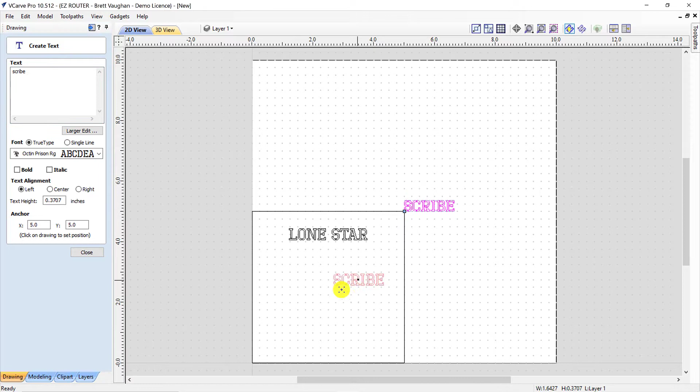We'll close that out and create a new one, let's do Scribe. We'll put that in here. So let's do some centering up here. So everything's centered. Go ahead and put a hole in here so you see the transitions, and we'll make sure that's a 1 inch. And apply.

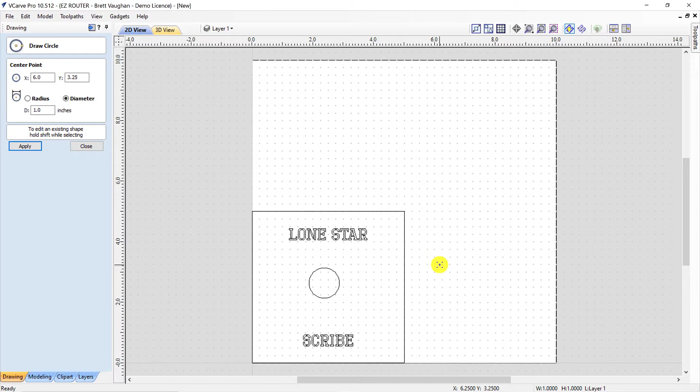All right, so here's our letters. We're going to scribe here, and scribe this, and then we're going to cut this out here in the middle, and then we're going to do an outside cut on that.

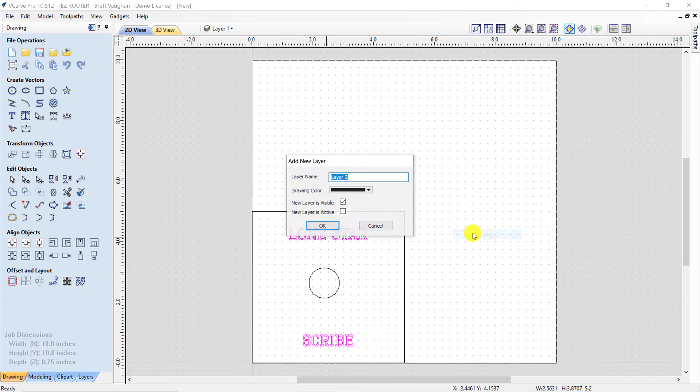So what I'm going to do is hold shift and right click - this is a layer, so I'm going to make a new layer and call this layer Scribe. You can change the colors if you want, just so you can see which ones are on the different scribe layers.

Now I'm just going to export this out as a DXF. I'll save it on my desktop so I know where it is - Scribe Demo. And we push save. So I'm going to exit out of this now.

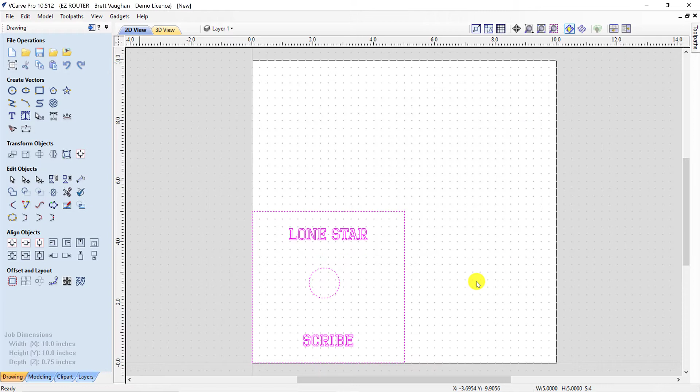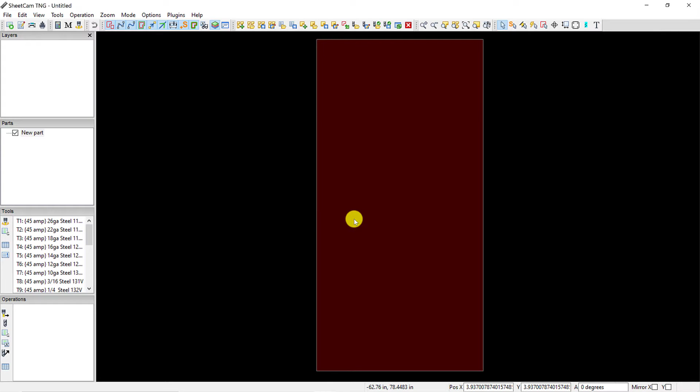And I'm going to open up SheetCam. Your SheetCam may have a different version, but it's pretty much all the same. You're going to go File, Import Drawing, go to the desktop, and then there's the Scribe Demo, and it should be coming in here in a minute.

All right, so inches, bottom left, no different there. And here's the processes. So what we're going to do is create our Scribe process first. We have Scribe in here, which is a T100 tool. So we're going to create a process.

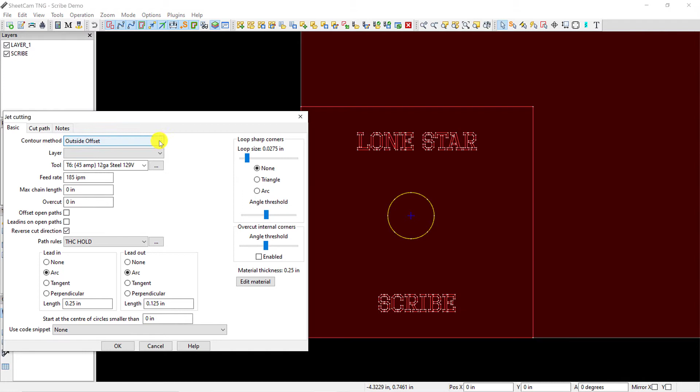We're going to choose no offset because we're going to be on the line. We're going to choose our Scribe layer, and we don't have to worry about that, and put no amperage on that - we're going to be scribing on this one, so that T100 tool comes in handy. Make sure your reverse cut direction doesn't matter on this one. We have no lead-ins and no lead-outs because we're just going to be on the line, and then we'll press OK. So that just created that process for scribing.

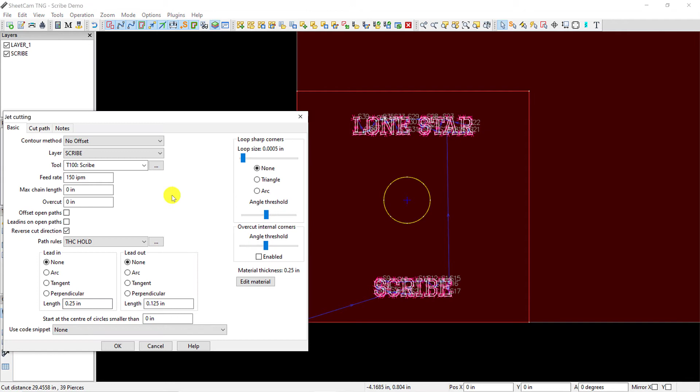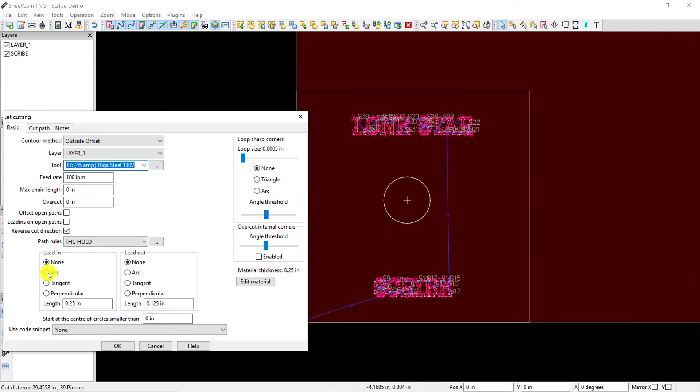Now we're going to go back and create a new cutting process - an outside offset for layer 1, which will automatically do an outside offset here, and we'll reverse it and do an inside offset there. We're going to be cutting 10 gauge in this video, reverse cut direction, arc in and arc out, with a 1/4 inch lead-in and 1/8 inch lead-out.

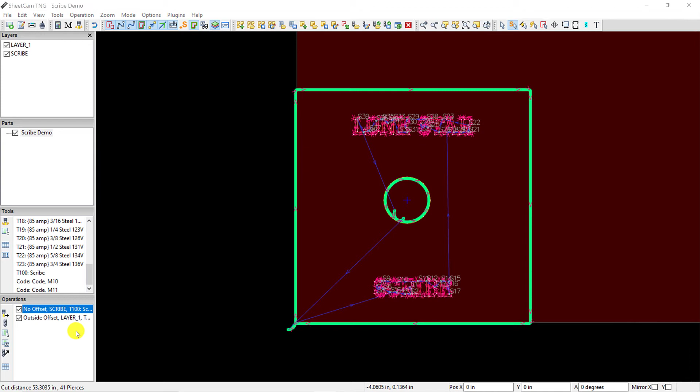There it goes. I want to move my start points - let me change some stuff up here. Let me make sure I'm on the right layer. Now I can actually move my start point - we'll start it over here, just like that. Then we'll go to the move button, click once on the screen, and that gives me a little bit of gap in between there. So that's the process for that, and now all we have to do is save.

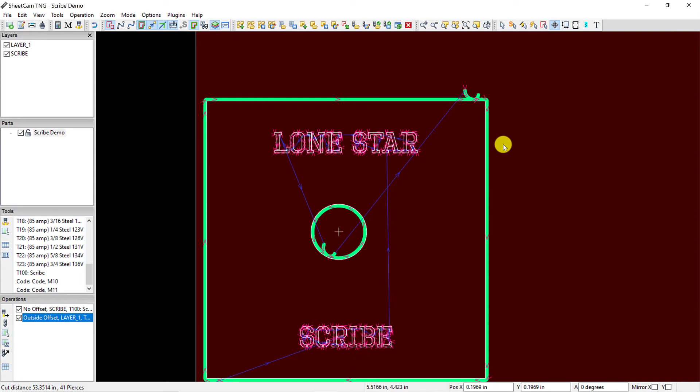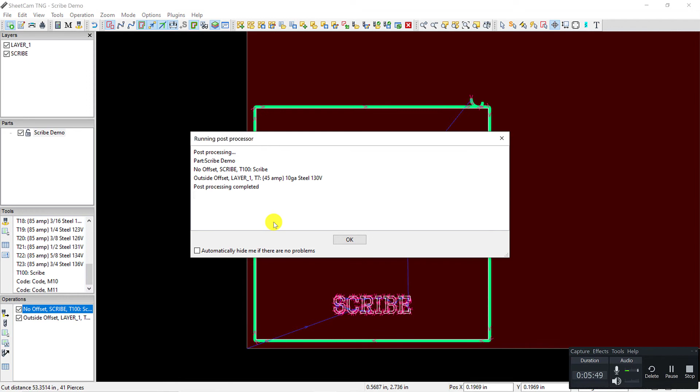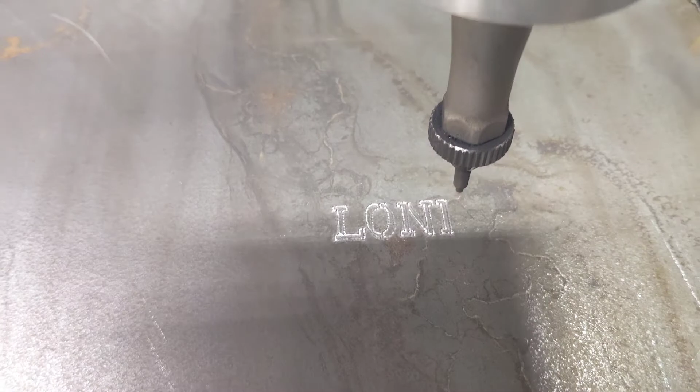So now we're going to jog to where we want to start. We're going to 0, X, Y, and Z. It'll move over and do a touch off, and then once it does the touch off, it'll move to the scribe offset, and then the scribe will come down and begin scribing. I'm going to speed things up so we don't have to sit there and watch the whole thing.

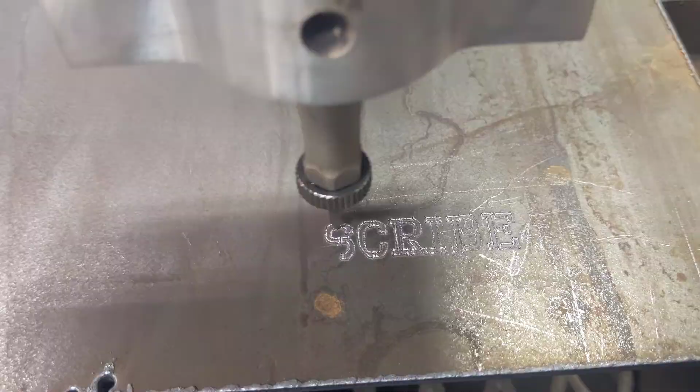And now it's going to do the inside cut, and then after that, it'll move to the outside cut.

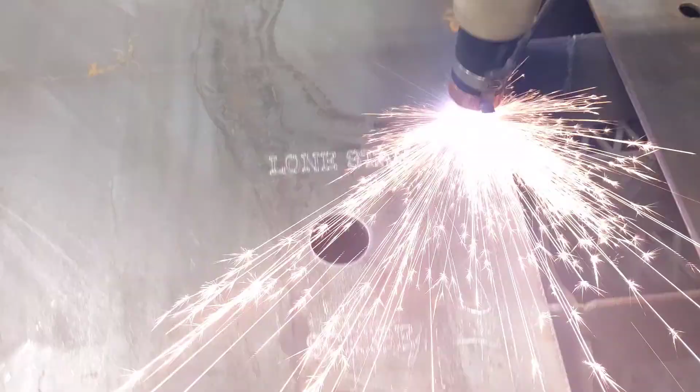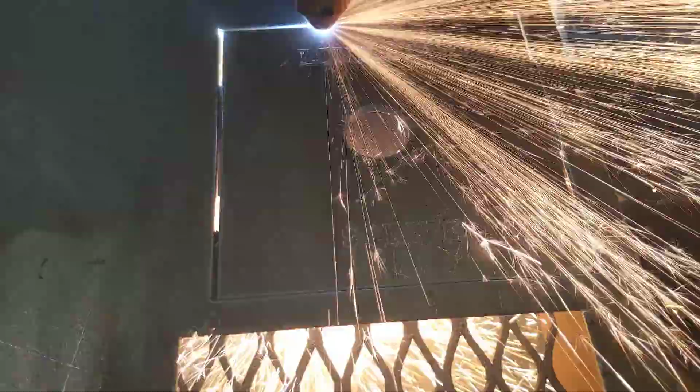And that is the scribe process from Lone Star Cutting Solutions. So if you have any questions, be sure to contact our technical department.